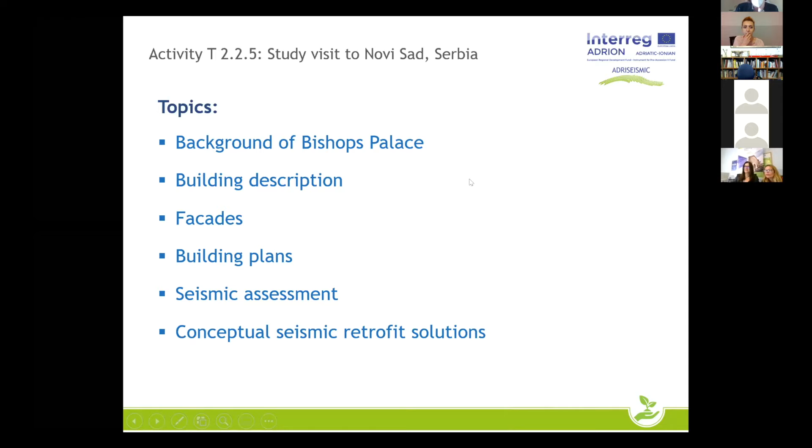So the background of the Bishop's Palace in Novi Sad, and a bit of the layout. As I have shown at the very beginning, the Bishop's Palace is in the neighborhood of, this is Bishop's Street. It's in the neighborhood of Trg Republike and the gymnasium, which is here, and the cathedral of Saint George. There's another building here, which is an important building of Novi Sad, which is the city library, and the area that we are talking about, and that's Trg Republike.

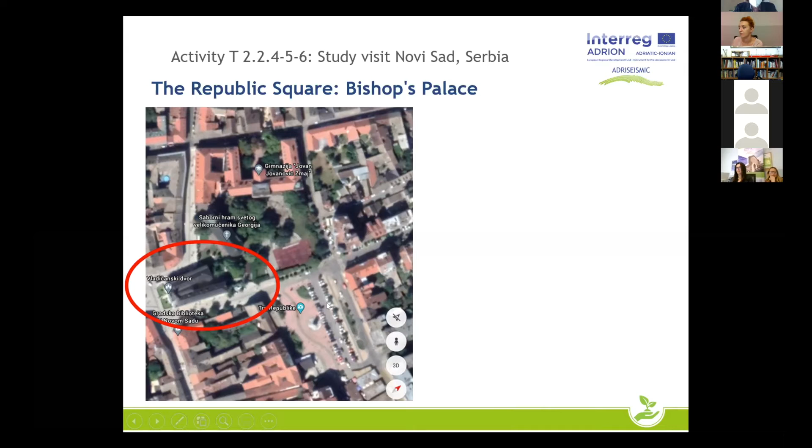So Vladičanski Dvor, or Bishop's Palace, is in a similar shape, which is a U building with extended legs, not equal in size, and the reason that they are not equal in size is because one of the legs is facing the cathedral, and because of its axis, it's slightly shorter.

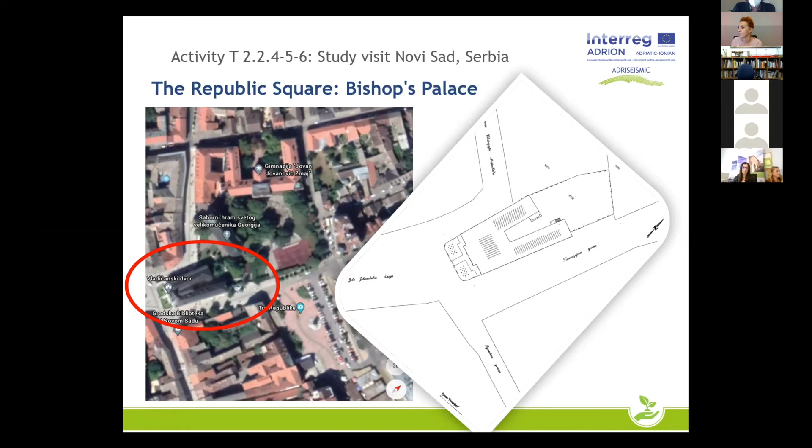The Bishop's Palace was constructed in 1741, which is a similar time as St. George's Cathedral, and it is sitting in its neighborhood. It has shared the same fate as all of the historic buildings in Novi Sad, as it was destroyed in 1849. The motivation for designing the new Bishop's Palace was initiated in 1855, so relatively quickly after the rebellion year of Novi Sad, but the design started later, done by Vladimir Nikolić, the same architect as for the gymnasium, in 1899.

The construction was started by Ferenc Rajhl, a contractor from Subotica, which is another city in Serbia, all the way up in the north, who, by the way, signed the design of the Bishop's Palace. The construction of the palace was complete in 1901, when the sanctification was done as well.

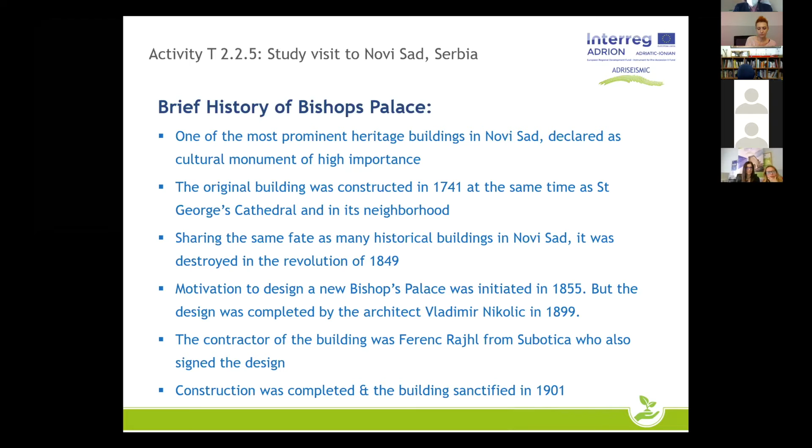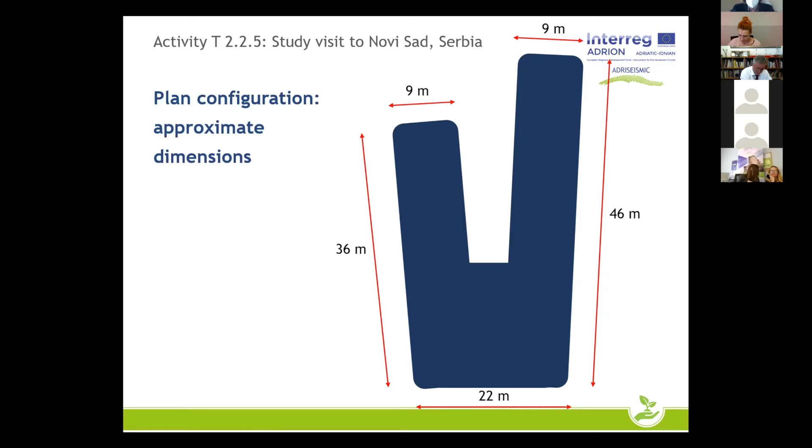Now, how the building looks. It's not small in size, but it's not very big. Probably that comment will come from the Italians. It is 22 meters wide at the main facade. The side facades are 46 and 36 meters, and the width of the legs is 9 meters, which is a corridor and the offices.

Okay, so from the pictures, it is easy to recognize that it is a two-story building. It does have a basement. The eave level is at 13 meters, while the height at the top of the spire is approximately 26 meters. It is a load-bearing masonry structure with wall thicknesses typical at that time, of 30 or 45 centimeters internal walls, and 75 centimeters external walls. You will probably remember from Svetlana's presentation that all these dimensions are coming from the larger size of the big bricks of that time, 30 by 15.

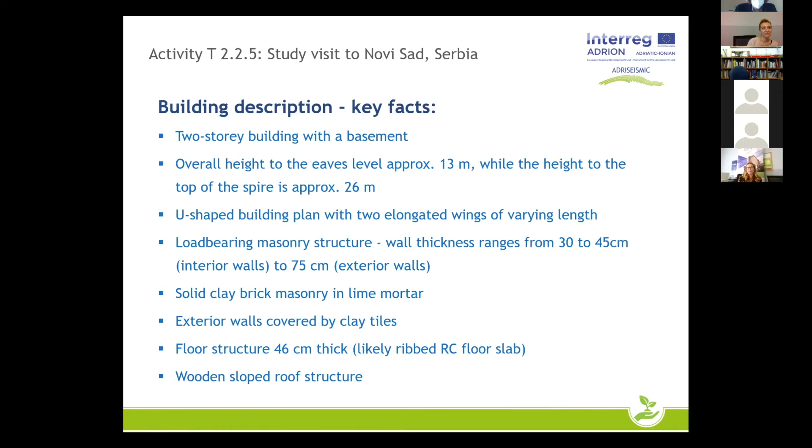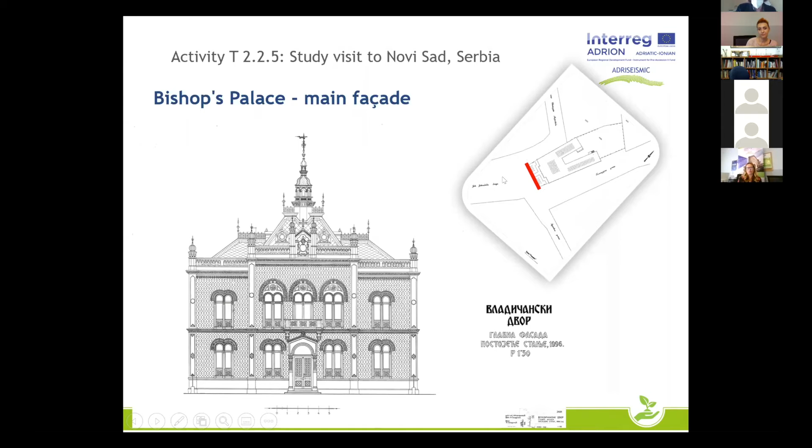The bricks are laid in lime mortar, and the exterior walls are covered by clay tiles. Floor structures are likely a reinforced concrete slab, and the roof is made out of timber. As I said, the main part of this presentation is going to be regarding facades. The main facade is facing Zmaj Jovina Street, hence the monument of Jovan Jovanović Zmaj.

It has biforous windows, all of them. One should note the cantilever balcony - that's the place where our crown prince and regent Alexander Karađorđević addressed the people from Novi Sad. Alexander is the regent who founded Yugoslavia and got the title of Crown Prince of Yugoslavia. You can also note the medallion at the roof cutting a colonnade - that is the coat of arms of Bačka eparchy.

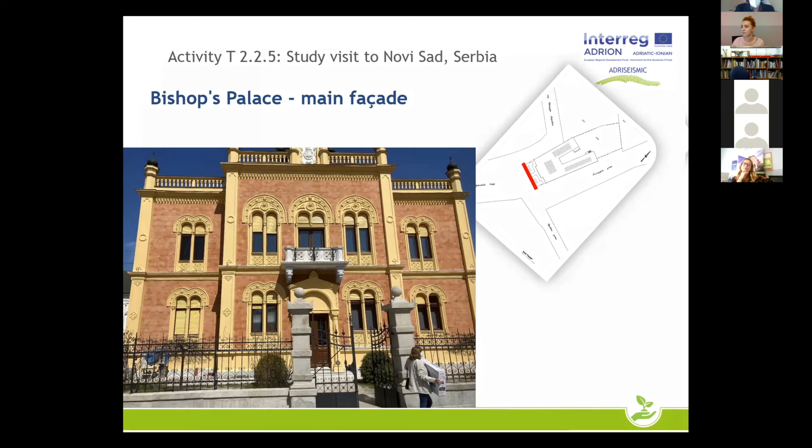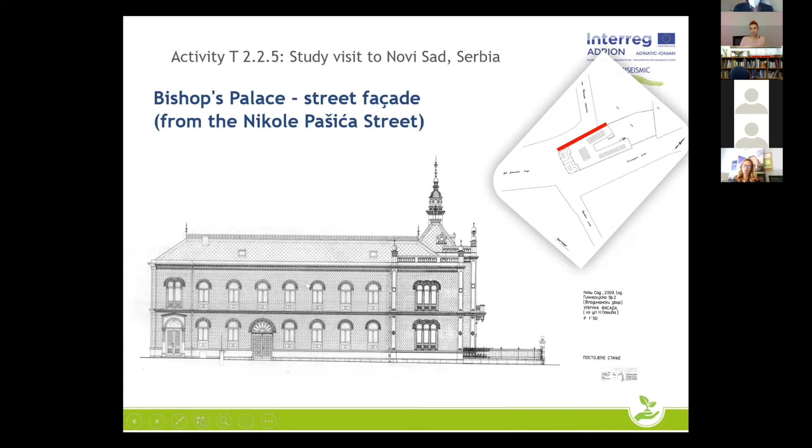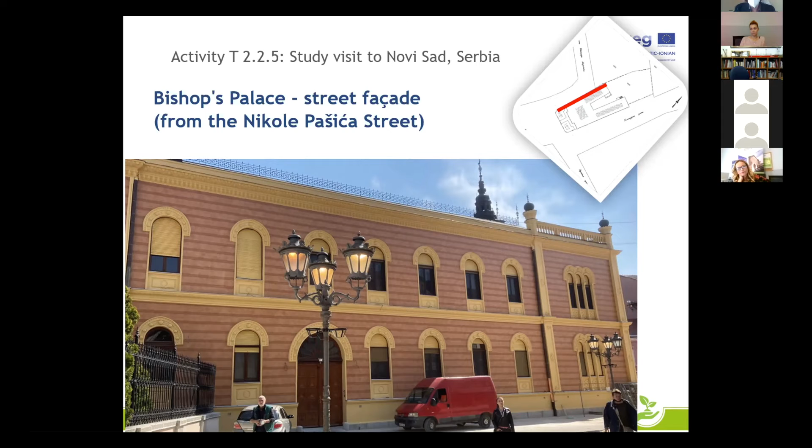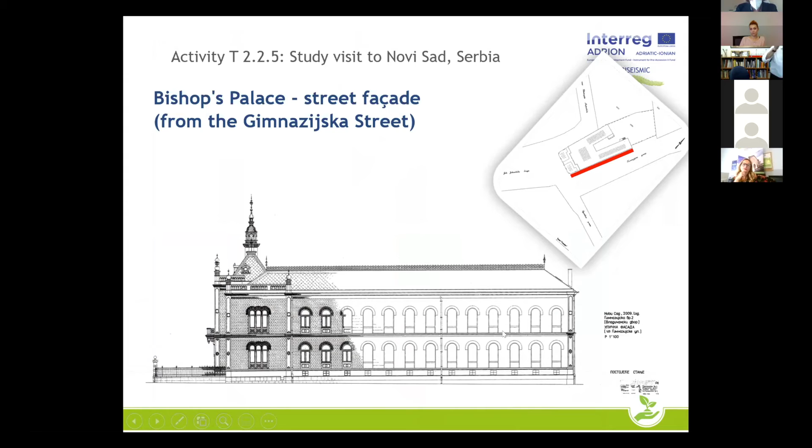On this original drawing, there is a facade on Nikole Pašića Street with biforas, triforas at the end, and monoforas windows along the side wall. This is how the building looks now. On the other side, the facade of Gimnazijska Street is the same, triforas on the corners, mono, and the other one. The tiles are ceramic, shaped like parallelepipeds. The top of the windows, which one might think is made of stone, but recent reconstruction shows it is made like a wall.

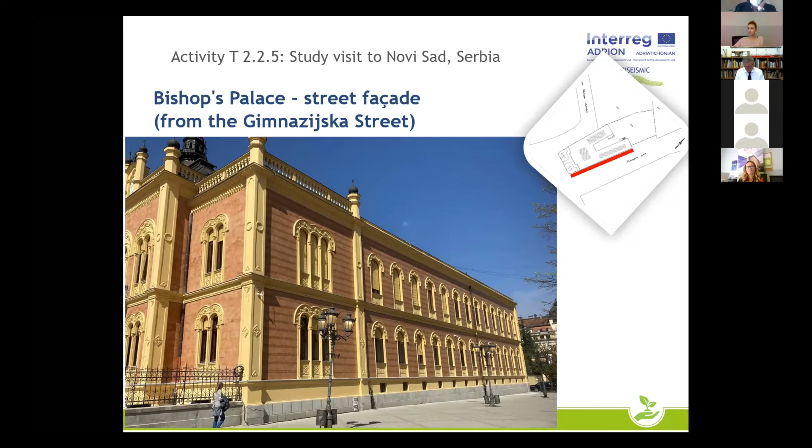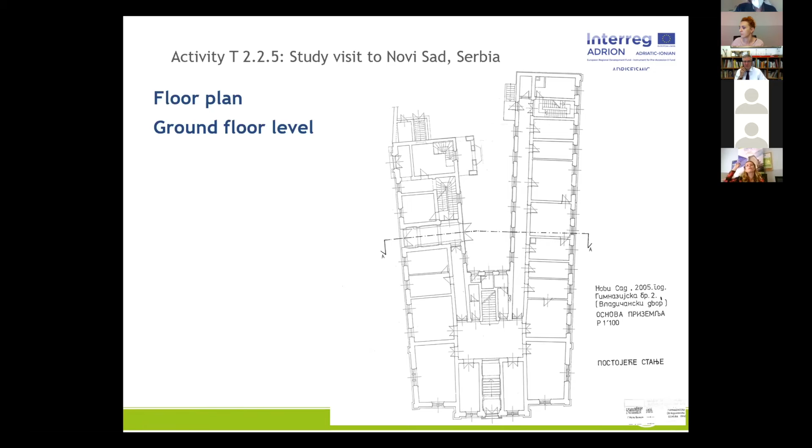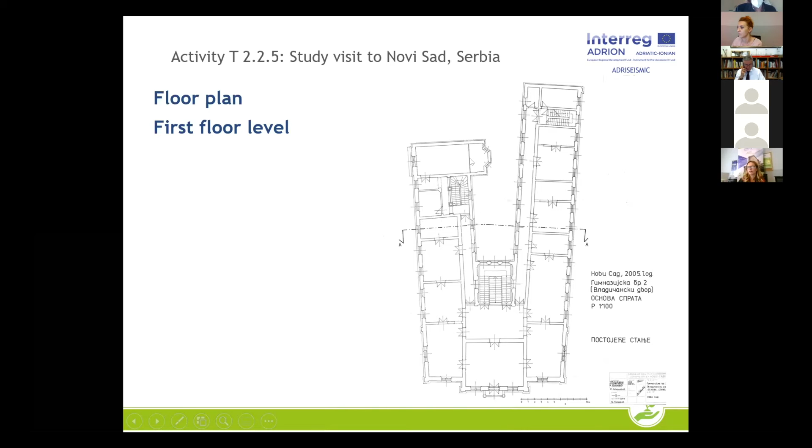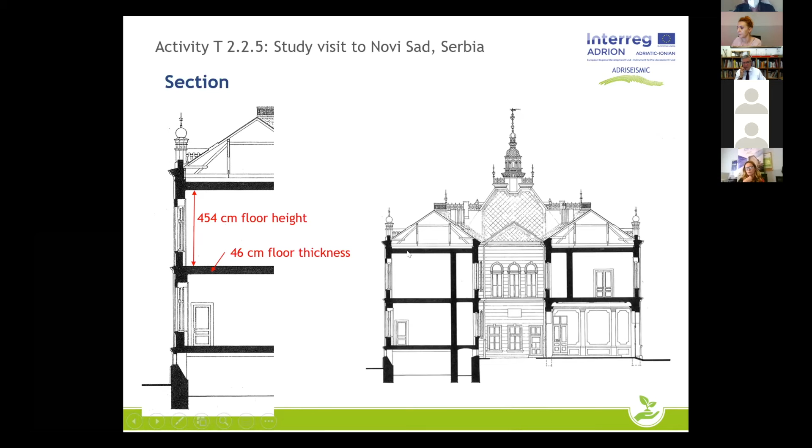The plans of the bishop's palace on the ground consist of corridors, hallways, and offices facing the street. We didn't have the opportunity to enter the building, unfortunately. The next level, the first floor, is more luxurious - it has a large reception area, hall, dining rooms, and offices with a chapel at the end. We believe, from measuring the original drawings, that the floor to ceiling height is around 4.5 meters, and the thickness of the floor slab is around 46 centimetres. We believe it's a reinforced concrete rib slab.

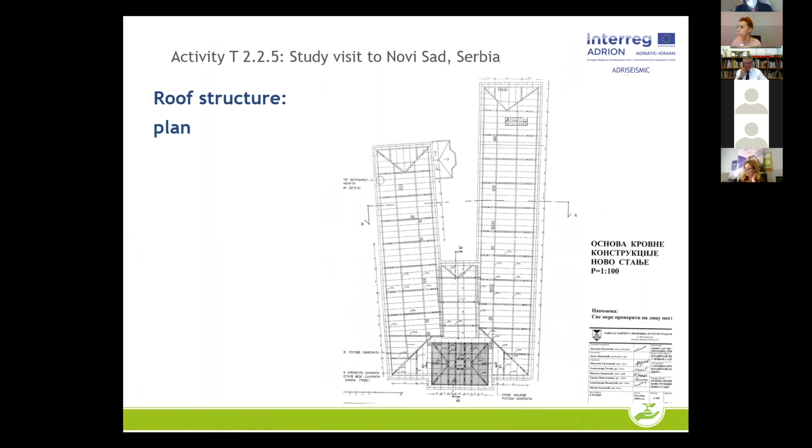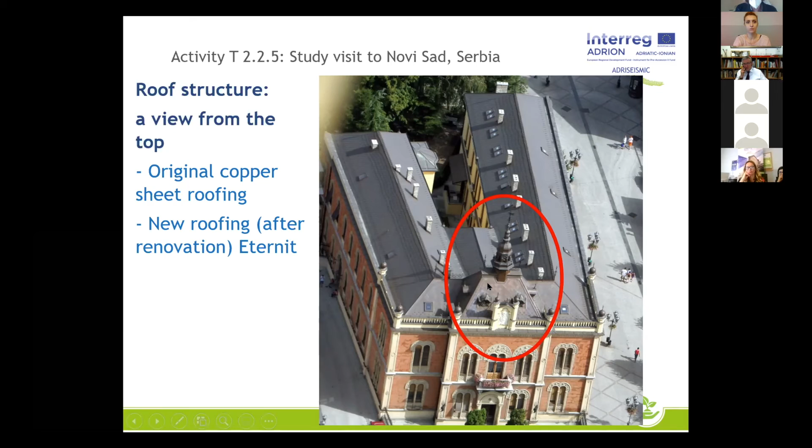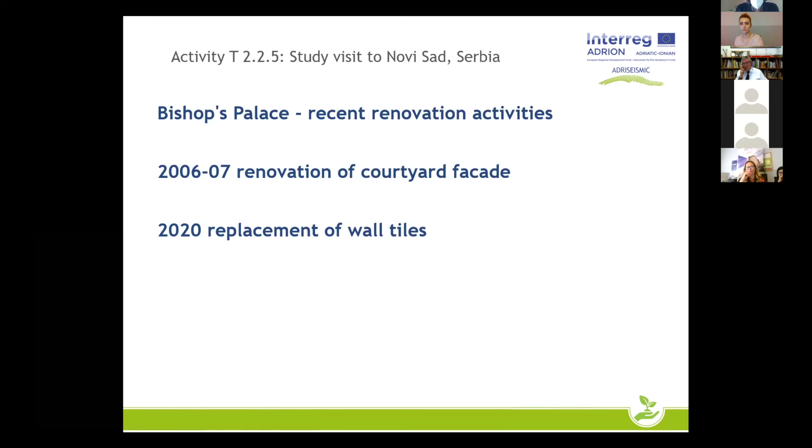I would like to say at this point that designers and investors should have more strict regulations regarding renovation of iconic buildings, and a more precise specification of materials used.

The microphone is muted. Olga, we can't hear you, please. Olga, we can't hear you right now. Can you hear me? Have you been hearing me before? Yes, we are - just for a few seconds we didn't.

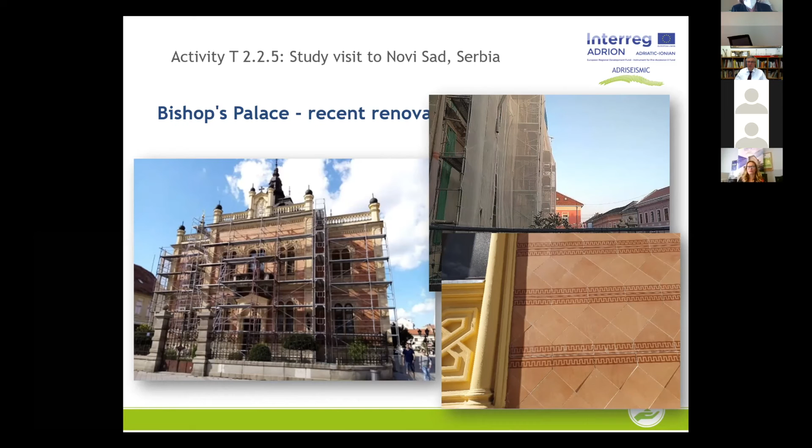So the main reason why this slide is on is in order for the designers, clients and investors to take special care about the materials used on iconic buildings. This is not an easy task because technologies and materials have changed, but iconic buildings do deserve special attention.

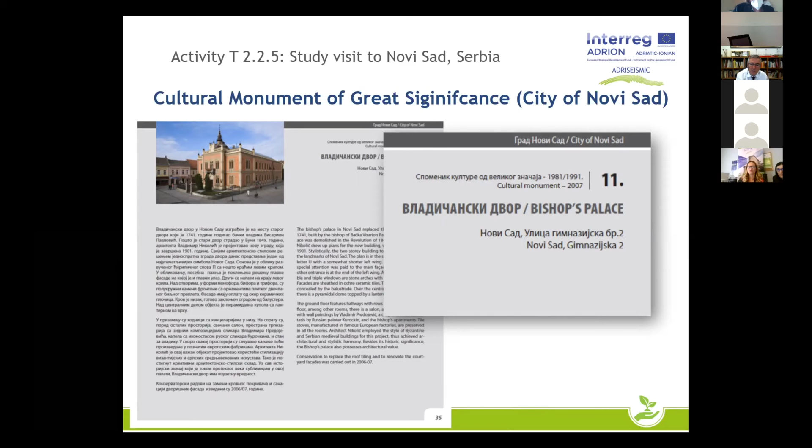As Snežana is saying, there is a book about the great iconic buildings in Novi Sad, and one such building described, mentioned and explained is Vladičanski Dvor, or Bishop's Palace. It is written in Serbian and English for your information if needed. As I said, the seismic assessment that applies to all historical buildings has been explained in the case of the grammar school by Svetlana, so there is no need to repeat that and take your time.

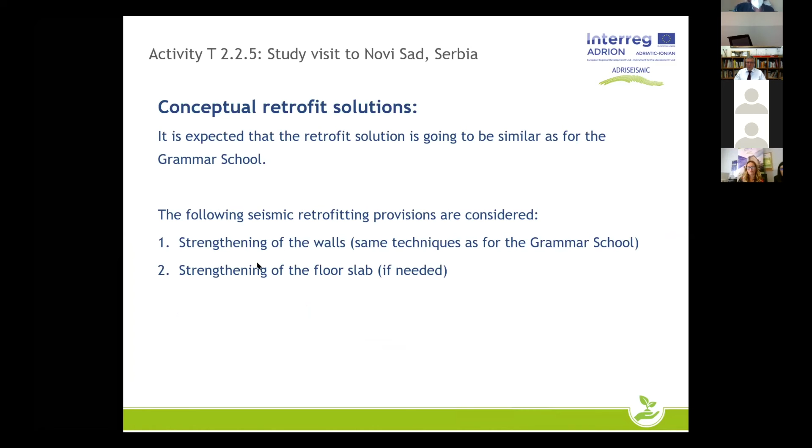The only thing I would like to talk about for this particular building is the possible retrofit of the Bishop's Palace. You will recognize the principle of these drawings and the explanation of the possible seismic need of the retrofit.

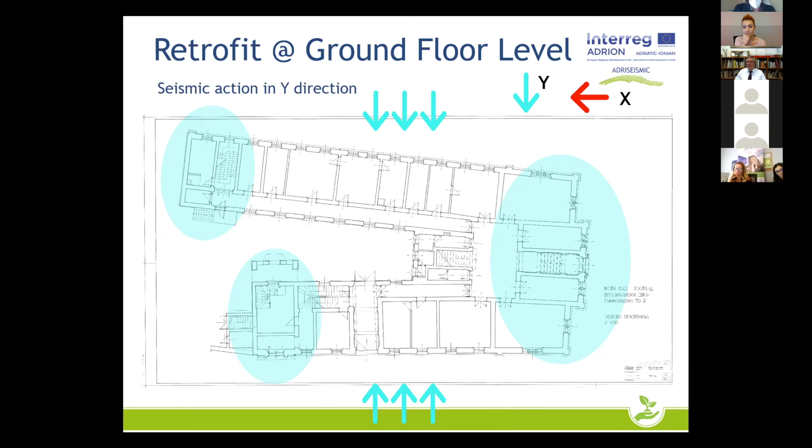For a cross action of the earthquake, we have in the Bishop's Palace three areas that mainly resist this loading: those full walls at the corners and around the staircases. The walls on the facade, acting as columns, need to be checked - hopefully never, but if the significant earthquake occurs, or if funds become available, they can be checked for a possible earthquake, and special attention should be taken on these walls here, which are hatched.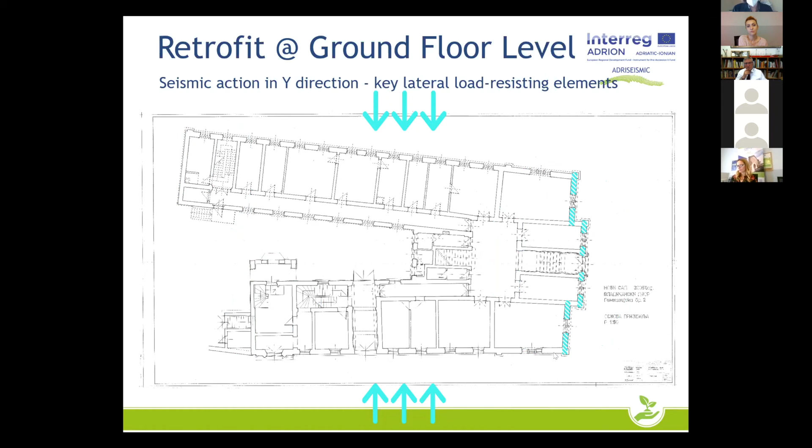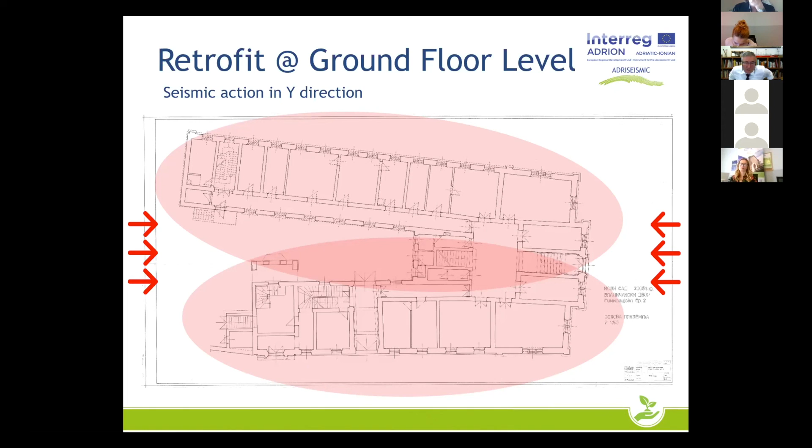Hence, the possibility of a need to retrofit applies to those walls which have a significant amount of openings. For a different direction of seismic loading, which is longitudinal forces, there is much more of the wall-columns that can resist this loading - that is the internal solid walls in both legs and the walls around the staircases.

The wall-columns on external walls can be jeopardized in both legs. That needs to be checked for any hypothetical earthquake, and they might be affected by the retrofit.

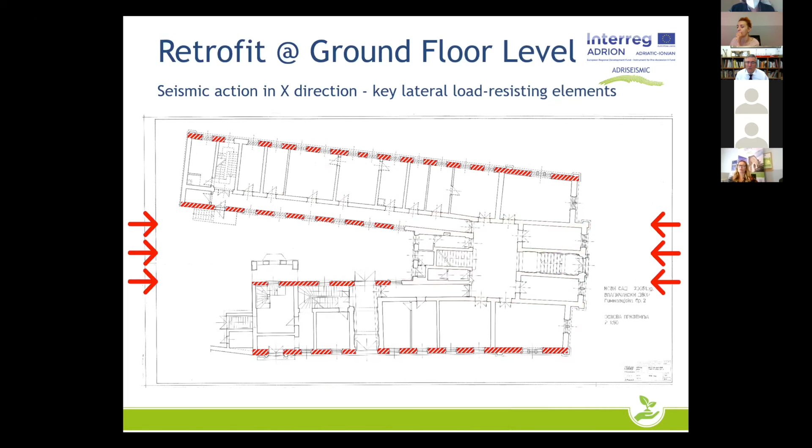This is as much as I would like to tell you about possible retrofits due to seismic loading, because the ways to strengthen the Bishop's Palace for earthquakes have been detailed in Svetlana's presentation, so I don't think I'll be using your time anymore. Therefore, thank you very much for your attention, and I call upon your experience in similar buildings, and I praise your contribution to discussion. Thank you very much.